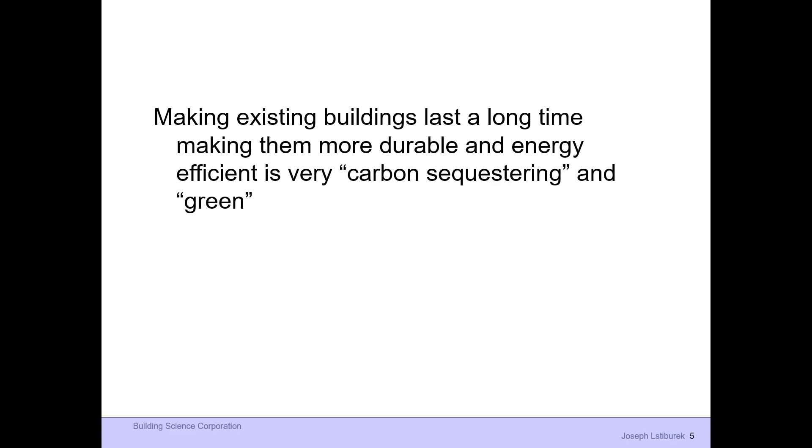Making existing buildings last longer and more durable and energy efficient is very carbon sequestering and green. So if you take a building that's already been built and turn it into something that lasts a very long time and is ultra energy efficient, wow. Of course, what I'm going to tell you is that we're doing it so wrong that we're actually destroying our existing old buildings because we're doing it incorrectly, and you're better off not doing anything at all instead of doing something that's stupid.

I'm already in trouble. Okay, that was a double duh. Yeah, there's more. Wood is good, it grows on trees. Repeat after me: wood is good, it grows on trees. I know, I'm a legend.

Triple duh. Yeah, there's more. New buildings are easy, existing buildings are hard. All these people saying we want to be net zero by 2035, or whatever, must be Harvard or MIT grads because they have no freaking idea. The new stuff is easy compared to doing the old stuff. And you want to do the old stuff in such a way that you don't destroy the historic character of it. So can we take existing buildings and not screw it up? The answer is yeah, but we're not doing it the right way right now. I'll get into that.

Historic buildings, really, really, really not easy. Because the best way to do things is to insulate the buildings on the outside. I grew up in Canada, and when it got cold, we would pull the sweater over the outside of us. We wouldn't eat it and shove it into our ribs. So you want to be a sweater wearer, not a sweater eater. Most wood frame buildings are built by people that eat their sweaters as opposed to wearing them, you know, duh.

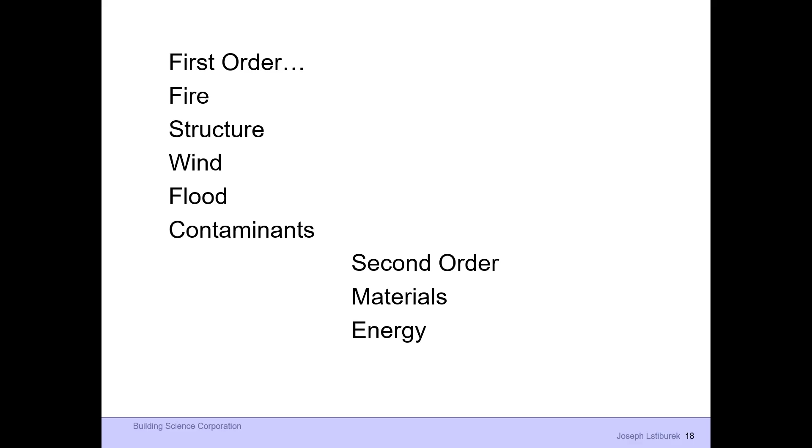So, first order: fire, followed by structure, followed by wind, followed by flood, followed by contaminants. The second order are materials and energy. Our codes evolved based on fire first.

The city of London burned, then Chicago burned in 1871, which was the last time the Leafs, I think, won. The very next year Boston burned, but nobody remembers the Boston fire because back then Boston always finished second.

So in the United States, we build out of stuff that burns, but not a lot of people die because we're very good at it. We just happen to be forgetting why we were so good. And so now thousands of buildings have burned in California, so we have to build a wall between California and the rest of the country so those ideas don't get across the Mississippi.

I warned them about this. Most of the houses that burned did so because their attics are vented. Vented attics let embers in. And then we're over-venting our walls. So you don't want to vent your wall and you don't want to vent your attic.

Oh my God, they're going to rot. No, they're not. You have to build them differently. Well, we have to ventilate our wall. No, you're an idiot.

And by the way, it's really dangerous. We'll get into that. The trouble is that the energy folks, they don't understand physics. They're activists. So if you can't do math or physics, you're an activist. And they're very, very successful. So we're changing the energy flow, and we're screwing up the other stuff that's working just fine.

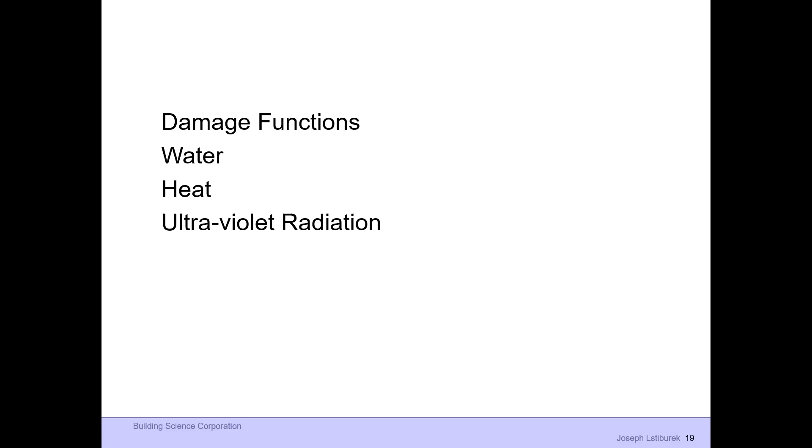There are three principal damage functions, and we call them damage functions because they cause damage. I'm just laying this out. The worst of the worst of the worst is water, followed by heat, followed by UV. They're listed in an order of importance. This is after we've handled fire and structure. And we shouldn't focus on these in such a way that we screw up fire and structure.

Fire first, structure second, energy last. What's driving the boat now? Energy. And it's screwing up the fire and the structure. I want the energy to be there. I just don't want to hurt the fire and the structure.

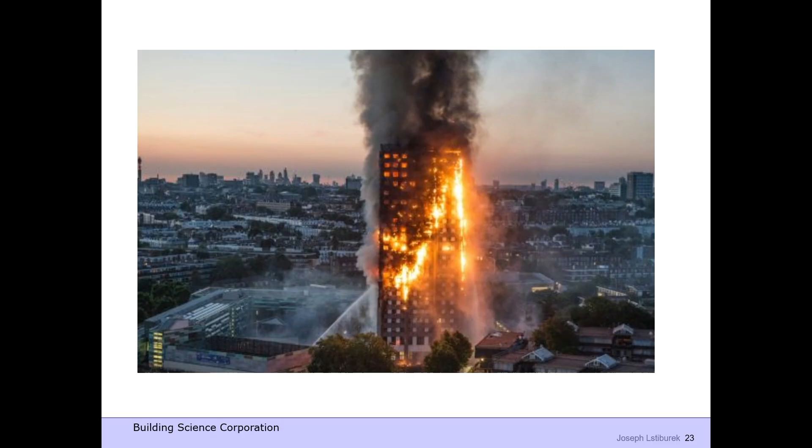Grenfell Tower, United Kingdom, June 2017. 72 people died. Now, what the press didn't tell you was that this was a retrofit of an uninsulated masonry building, and that the fire started on the second floor because they changed the heating and cooling systems to use refrigerants that were greeny-weeny but were flammable. So we have a flammable refrigerant because the greeny-weenies said we want to have greeny-weenyism. That started a fire that got super insulated on the outside to save energy. And, you know, this is embarrassing, disgusting, and stupid. And we want to make sure that none of those people cross the ocean with the pilgrims and the boats to bring that information to the United States.

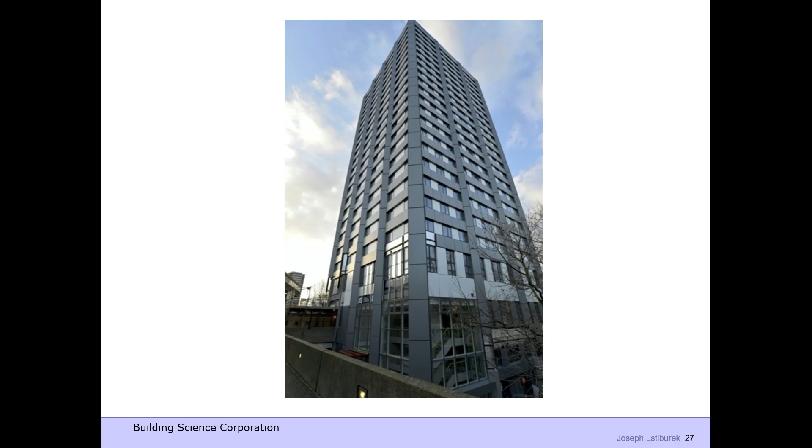I'm kind of making the stories up a little bit here. This is what it started as - it's 35, 40 years old, no insulation. It was beautiful. Then they insulated up the yin-yang wazoo on the outside. The real problem was the airspace, the ventilated cladding.

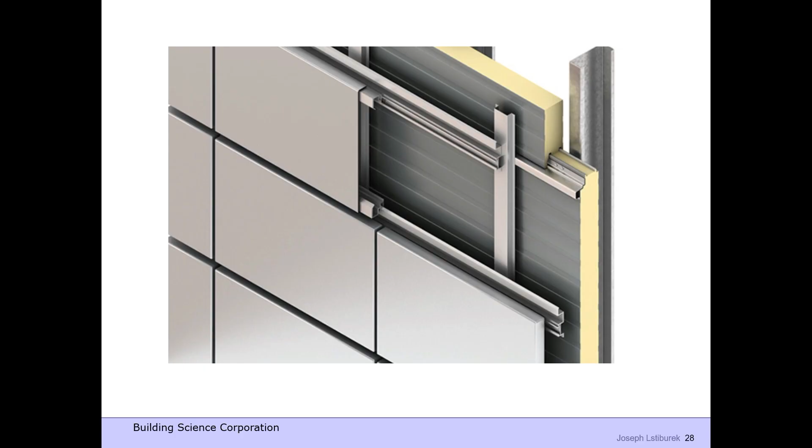That ventilated cladding allowed the fire to go up all the way. Well, we need to ventilate the claddings. No, you don't. Well, we have to have ventilated cladding. Says who? Well, we read it in, we did a WUFI analysis. You're an idiot.

Okay, I'm going to start talking about effective compartmentalization, egress, and whatever. So this is what the old building was. There was nothing there to burn because it was all out of concrete and rocks. Rocks don't burn. Repeat after me - rocks don't burn.

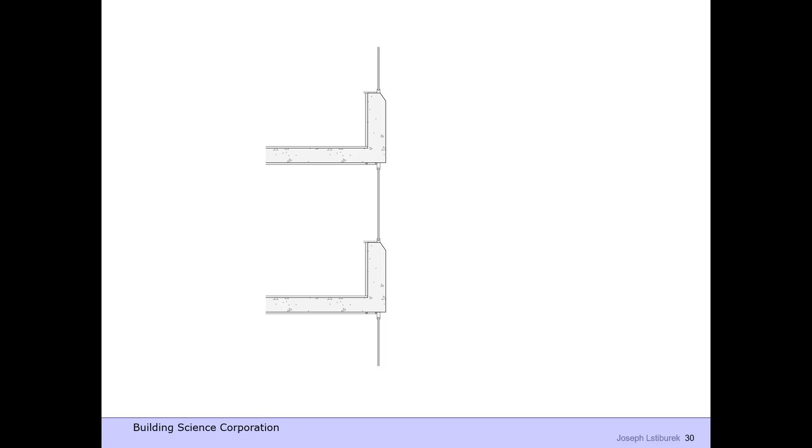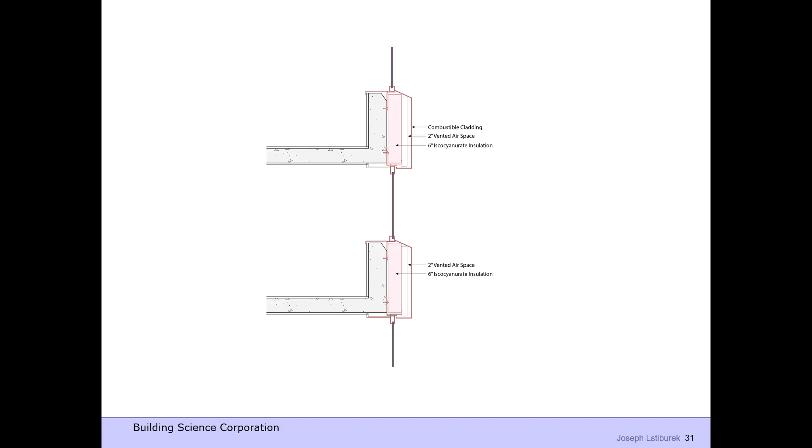So let's insulate it on the outside with compressed napalm insulation. And then ventilate it with a 2-inch airspace, because man, you want to ventilate the heck out of your cladding because it's more energy efficient. No, you're an idiot. So the fire starts on the second floor because of the flammable refrigerant, which they're not telling you about. You shouldn't have air conditioning systems that have stuff in them that burns. Well, it's green. You're an idiot.

And it goes up the cladding space, the 2-inch space. There are people that want 4-inch spaces because it saves energy. You're an idiot. If the airspace is a 1/2 inch or less, you don't have to fire stop it, because the boundary layer friction of the two surfaces starves the fire. We learned about this in the 60s.

Elvis Presley, not Elvis Costello. And so we burned walls and we figured it out.

So this idea of a 2-inch and 4-inch ventilated cladding to save energy is dangerous, and you shouldn't do it. Stop.

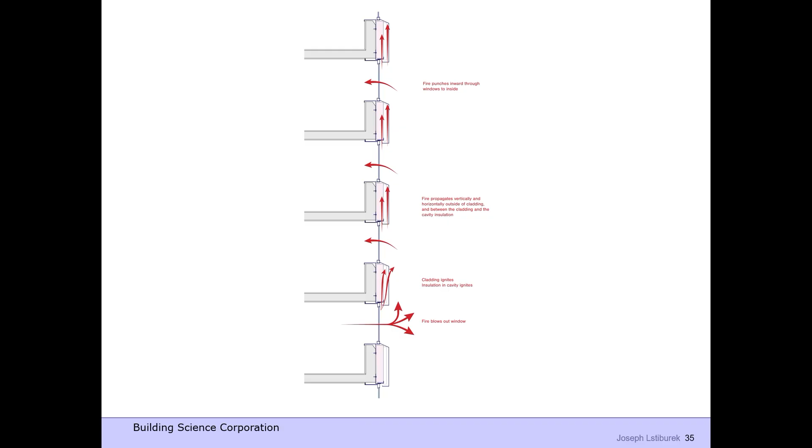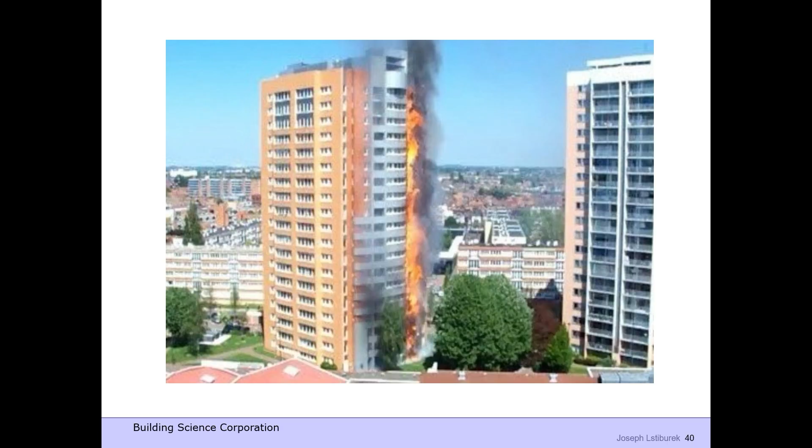There's going to be a name coming up that you won't believe was the actual name: the Dubai Torch Tower. If the airspace had been less than 1/2 inch, this wouldn't have happened.

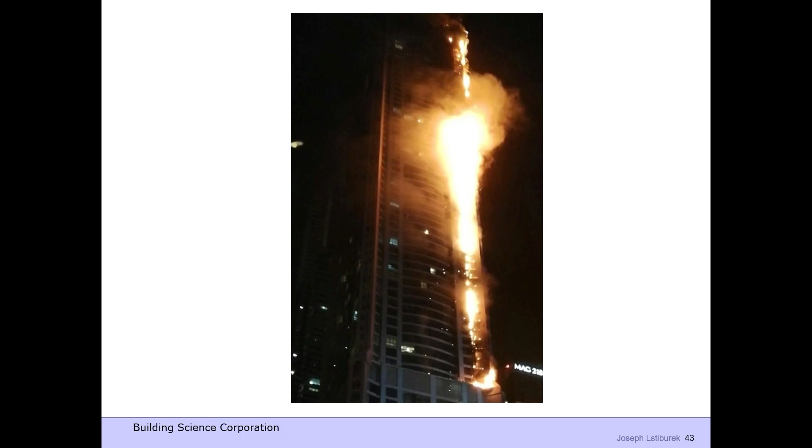And now for something completely different. Marco Polo Apartments, Honolulu, Hawaii, July 2017. How many people remember the name EIFS, Exterior Insulation and Finish Systems? You've got expanded polystyrene, EPS, with a very thin lamina. Well, it should burn. No, it doesn't, because there isn't an air gap.

So when they had a fire, the fire was basically constrained to just a unit or two. You don't lose the building, you just lose a little part. This is really important, okay?

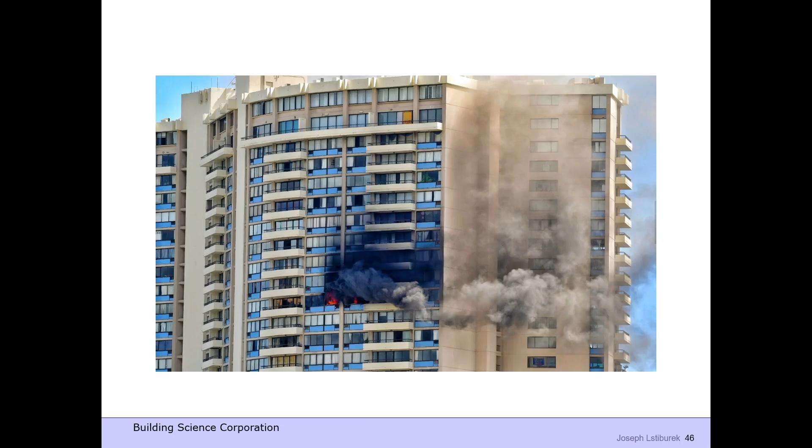Trump Tower. I'm sure you're going to blame the fires on Trump.

It popped out, but it was very limited because it wasn't a ventilated space. Didn't have a big space. Stop it with the big freaking spaces. Jeez.

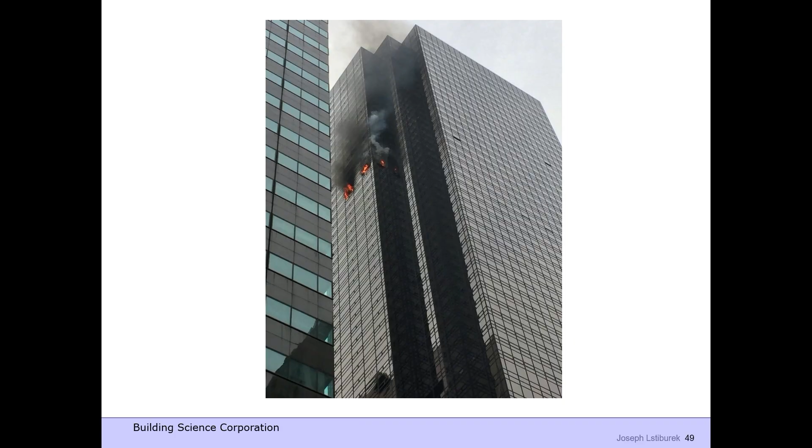Monte Carlo Casino. The thing that burned the most was the sign, which is mostly EIFS.

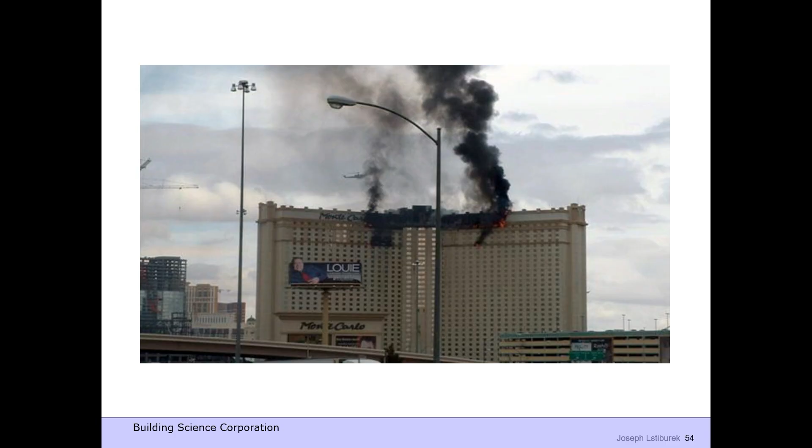So where did all this stupidity start? Hooker Chemical Company building, Niagara Falls, New York. They built it on top of Love Canal, but that's another issue. It was the first double wall. They had an 4-foot space between the inner layers of glass and the outer layers of glass.

The idea was they wanted to ventilate, and they were going to save so much energy because of the ventilation of the ventilated cladding. I got into trouble way back then because I argued with them. That was the first time I got yelled at by ASHRAE. I wrote a letter because ASHRAE gave them an award, and I said, in order for that to save any energy, they'd have to have supersonic flow between those two surfaces. And that would suck small animals and children off the sidewalk and inject them into low Earth orbit.

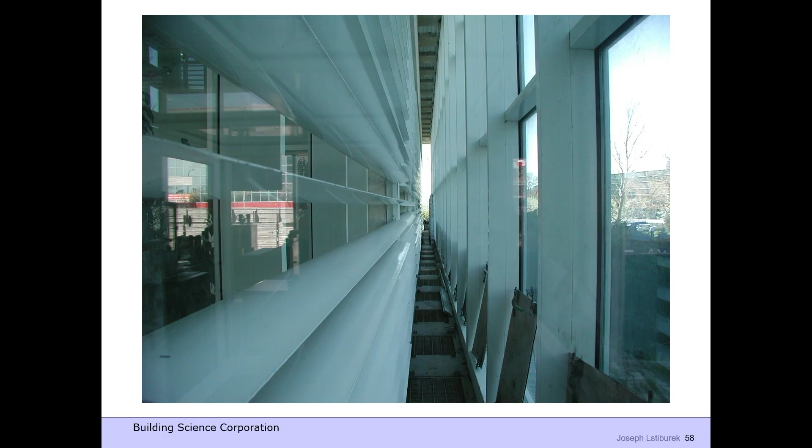Are you freaking kidding me? Colossally, batshit crazy, stupid. And we're encouraging it. I'm going to hunt you all down and talk sternly to you. Don't do this.

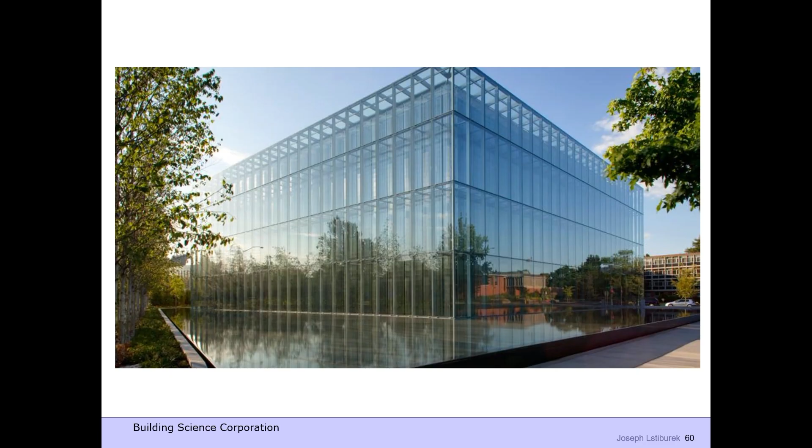Of course, if you are famous and you run a shoe company that's got a nice logo and you're a billionaire, they built this famous double wall. It got all kinds of awards. And I had some fun with them. I said, well, have you actually measured the energy consumption?

If you don't measure it, you're full of shit, speaking technically. I don't believe it unless you measure it. We did a simulation - I can get any answer you want with a simulation. Measure it. If you don't measure it, I don't believe you. I mean, look at this.

Wow, it's beautiful, only for idiots. I said, what you should do is that's where the homeless should be put up. Okay, that didn't get a laugh. It was probably not correct.

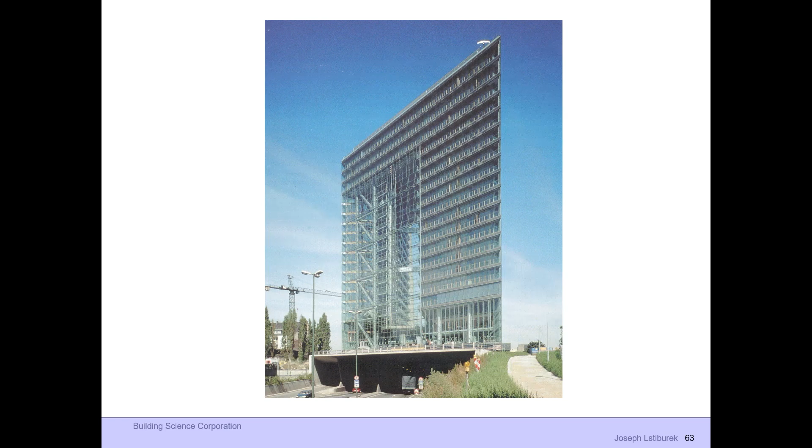So where did this stupidity come from? Yeah, they should stick to building Porsches. I mean, look at this. Oh, we got fans in there. Woo!

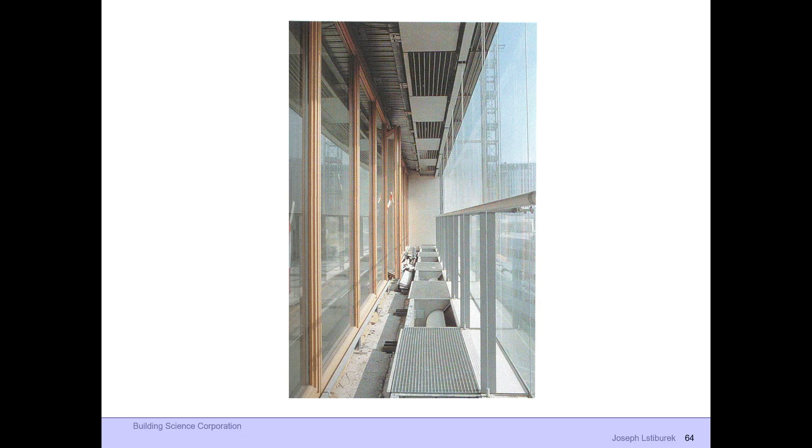Why don't you just have more efficient glass? You could have triple pane or quad pane, krypton filled, made by Lex Luthor Industries. Could have an R10 window that doesn't burn. I mean, look at this shit.

We need to build some kind of a trade barrier so this doesn't cross the Atlantic.

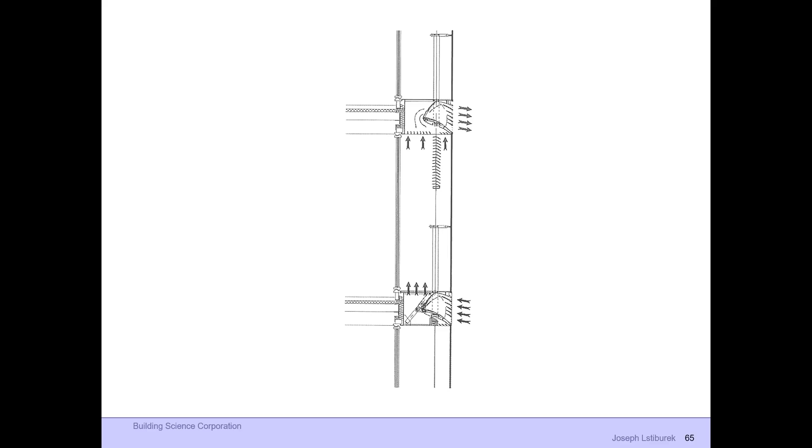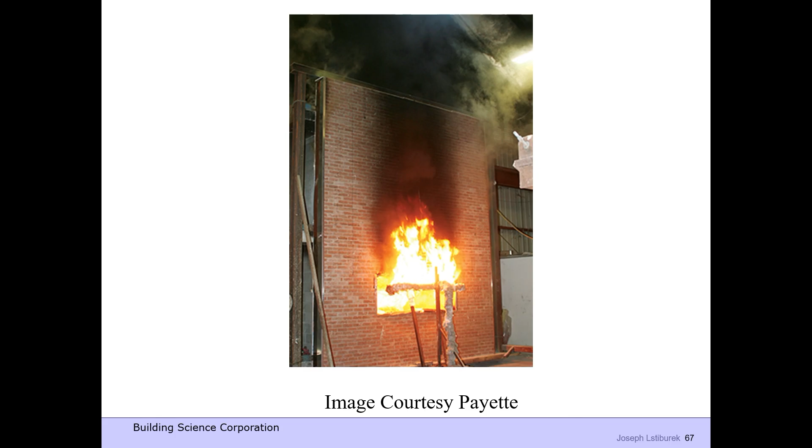Now, we became very good at figuring this out in the United States, NFPA 285. You actually build the wall and you burn it. If you don't burn it, I don't believe you. We did a calculation - I don't care. Burn it. We figured it out by burning things. Pass, fail.

Jesse Beitel was the legend. He's still alive. If you ever see him, shake his hand, hug him. I would hang out with him at code hearings, and he kind of adopted me. Wicked sense of humor, young stuff.

Young Joseph, make sure you burn it. If you don't burn it, I don't believe you. Okay, Jesse, okay.

Wildfires. Biggest problem: embers drawn into vented attics. Don't vent the attic. Anybody not get this? Well, you have to vent the attic. Why? To save energy? No, you don't.

To keep it from rotting? No, you don't need to vent it to keep it from rotting. Why do you vent the attic? You don't know, do you?

Well, it's going to make the shingles and the membrane cooler, and it will last longer. Well, don't use a black roof, use a white roof. Well, you're going to void the shingle warranty.

Okay, let me help you with this. Three identical roofs: one in Houston, one in St. Louis, and one in Minneapolis. Same size building, same insulation. Which roof is going to be the coldest?

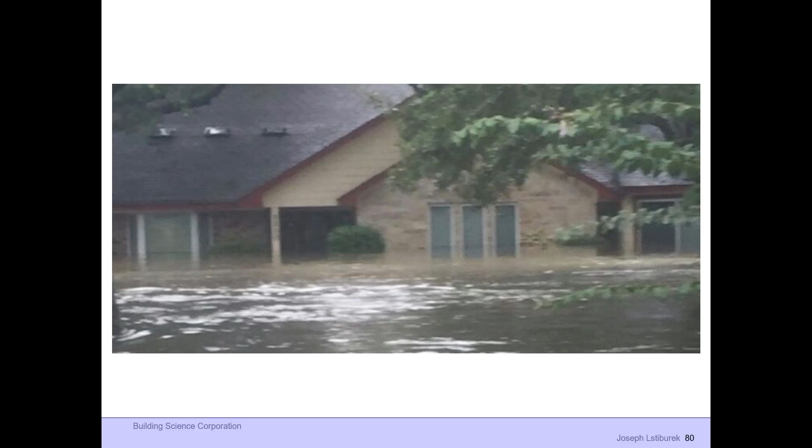So buildings that were built in the 20s and 30s are much higher. Why? Because the people that built them said, gee, it floods here, we should build up. Anybody not get that?

You go to New Orleans and you look at the older buildings, their floors are 5 and 6 feet off of the grade. The newer ones are just down there. Duh.

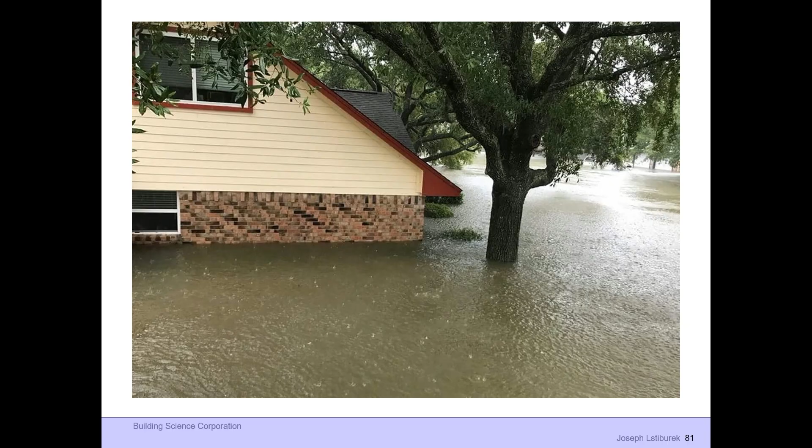Flood water is dirty, unhealthy. So part of this is once it drains, you have to clean it, decontaminate it.

No salvage by order of Smith & Wesson. This is Texas.

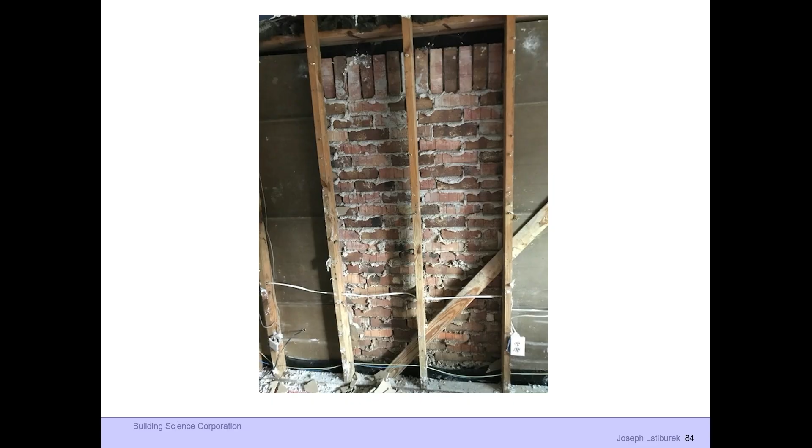So we wrote this up. It was Claudette's idea, I cleaned up some of the building science. LSU, the Houston home builders are really all over this.

Because we're going to still build stupid places where it floods, right? Right. Well, we can make it work. Yeah.

Oh my God, he's using spray polyurethane foam. We hate foam, get over it. It doesn't suck water, and it's washable, but only the closed cell, right? Right.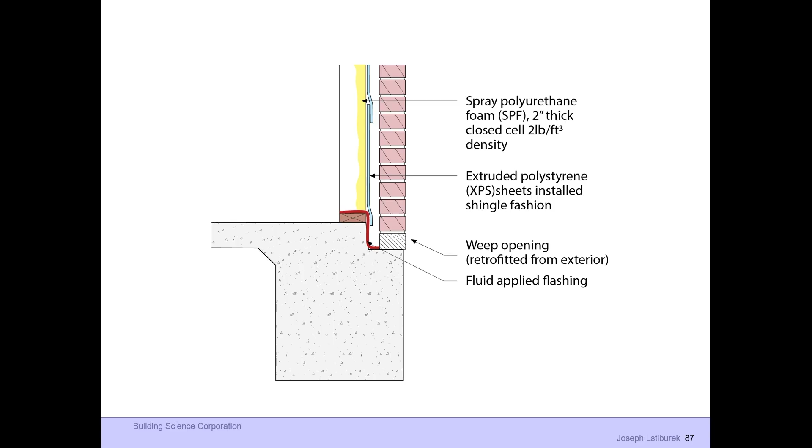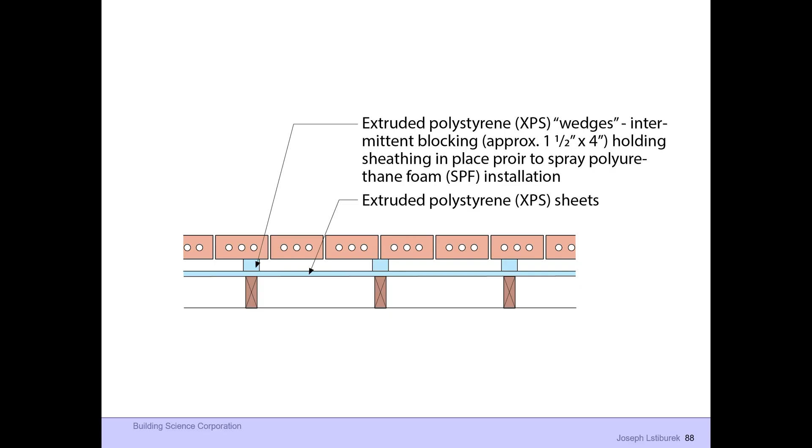Well, what about extruded polystyrene? Yeah, some of you hate it even more, but it's washable, right? Right. How about something that really pisses everybody off? Some extruded polystyrene, some closed cell, and an intumescent coating so it doesn't burn, and it's washable.

Well, this is a lot of carbon. Well, not over 100 years.

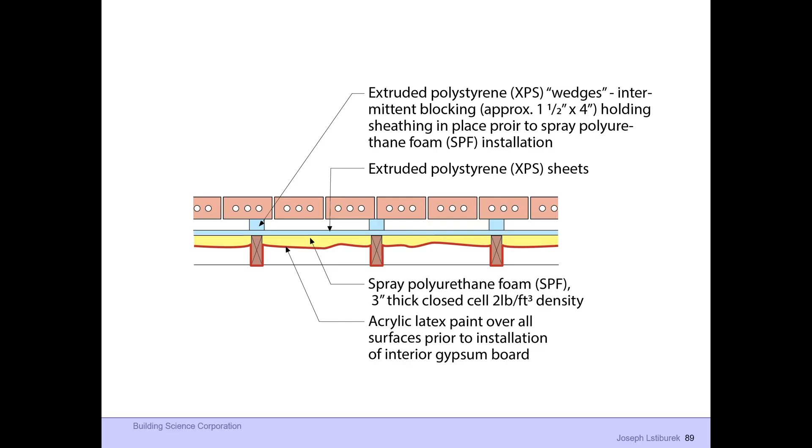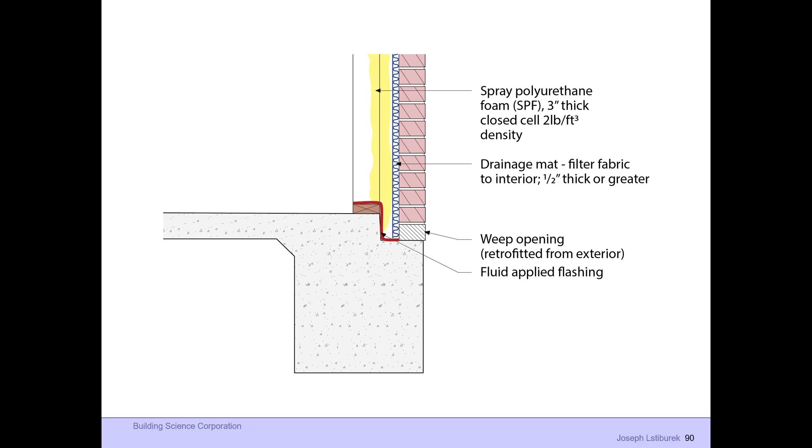How should we build it new? Put a drainage mat up, a half an inch or greater. Why? So it doesn't burn.

I just have to throw away the interior drywall on the first floor, right? Yeah, and wash it down.

What should you not have on the first floor? Carpet. Duh.

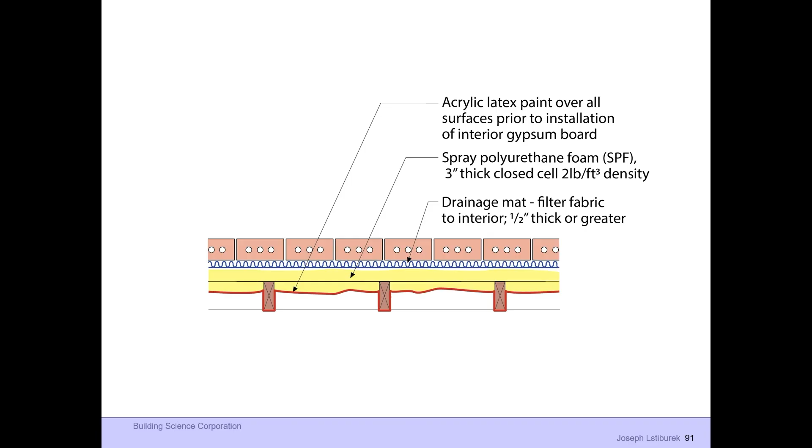All kinds of ways of doing it. There's a retrofit. Yeah.

What do they do in Florida? Well, they build up. They build the first floor out of blocks, put stucco on the outside. They paint the inside of the block. They got an air gap. And if it gets that wet, you just hose it down, right? Yes, Joe, yes.

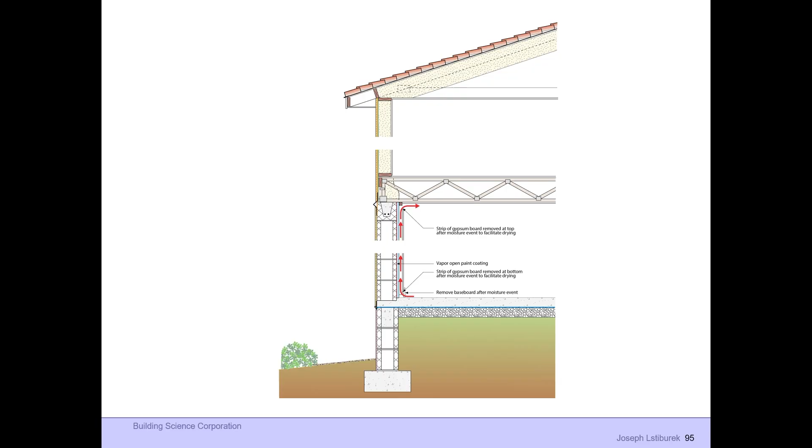Oh, can we do it with wood? Yeah, you can. Steel studs? Yeah, you can. Wow.

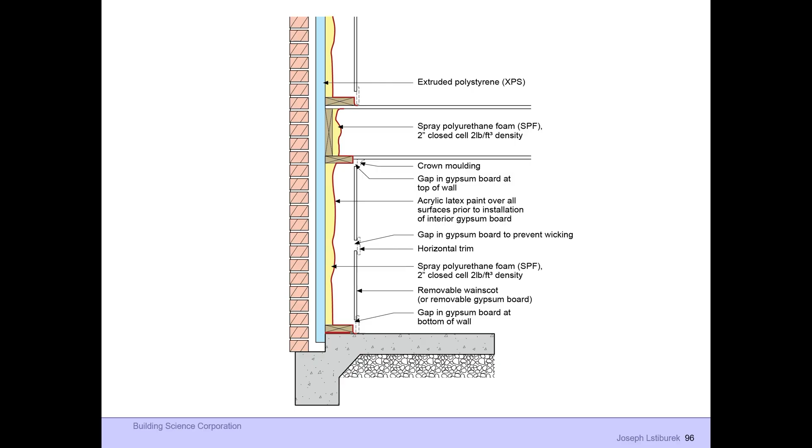Are we doing it now? Yeah. Again, Americans can be counted upon to do the right thing after all of the alternatives have been exhausted. Well, don't freaking build there. Yeah, good luck with that.

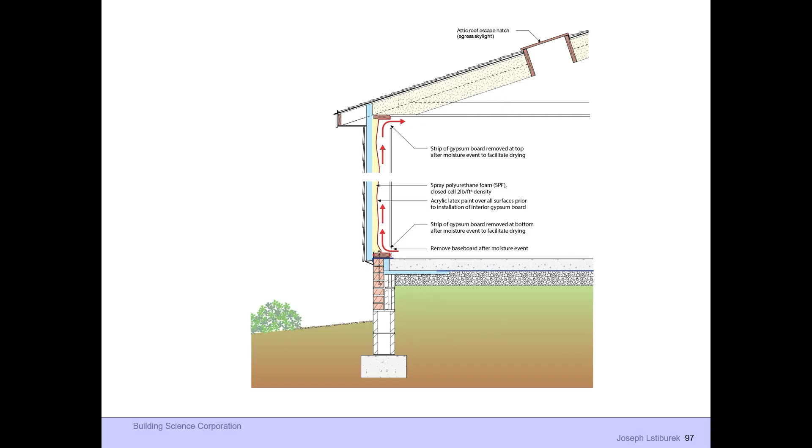Oh, even better. Whoa, it's got to be high enough, right? Right.

You can even dry it. Don't run the stucco into the ground. The stucco wicks water like crazy, right? Very capillary active. So you stop the stucco at the top of the slab and paint it.

And run a polyethylene vapor barrier and capillary break under the concrete. And you put a seat in the concrete because there's going to be some water in the block wall. When the water runs down the holes in the blocks, we kick it to the outside.

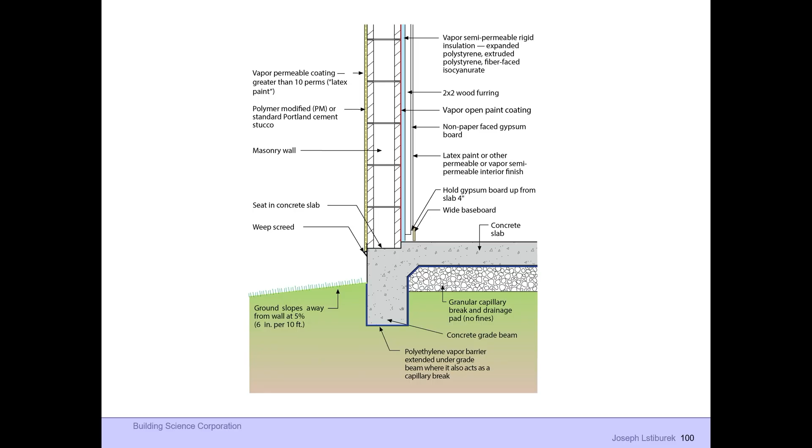So guess what we're doing now? All of the slabs in Florida have a seat. It only took 30 years. But hey, you know, it takes time.

Wow, this is a really robust wall that could handle the flood and a hurricane and an earthquake. Whoa.

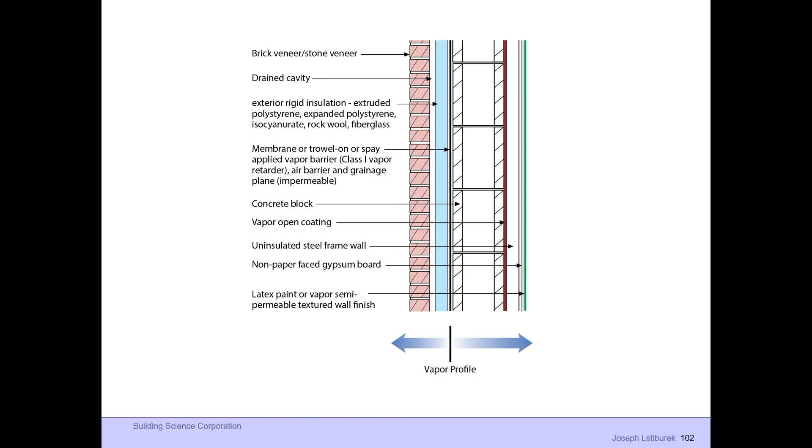You have to do the Carole King thing, the earth moves under my feet. It's earthquake resistant. Yeah, I know.

Put it on the inside. Well, I don't like foam.

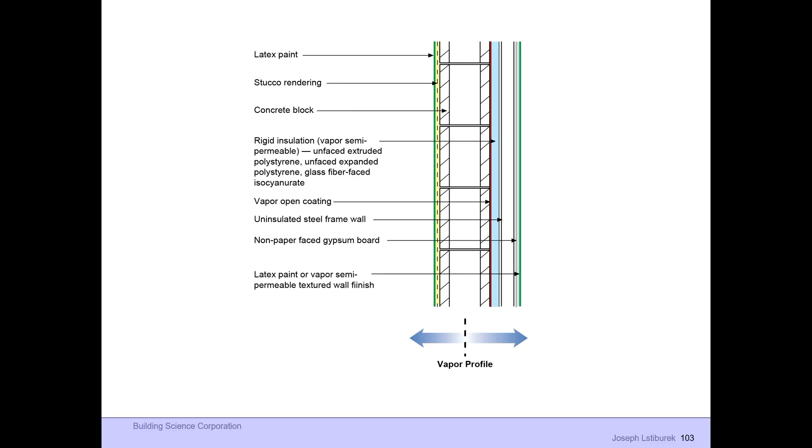Don't build where it floods. Hey, you know, you don't like it, don't use it. Don't build there.

I don't like all the blocks. Can I do it with steel studs? Sure, but don't put any insulation in the steel studs. Why? Insulating a steel stud is a thermodynamic obscenity. A 6-inch steel stud, put in an R19 batt, the effective thermal resistance is R5.

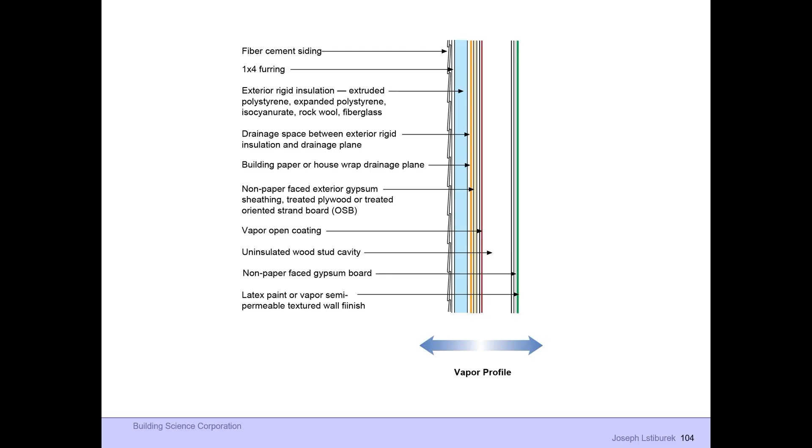Well, how do you know that? Well, because steel is 300 times more conductive than wood. You know how I know this? I've never seen wood wiring, or a wood frying pan. Well, wood frying pan once, but...

This is neat. This doesn't burn, doesn't blow away, isn't an earthquake problem. It can be washed and cleaned. It's energy efficient. We know how to do this. We aren't doing a lot of it, but nobody... we don't have the technology.

Yeah, we have the technology, just things have not become so intolerably painful and bad. Stupid has to hurt quickly, all right?

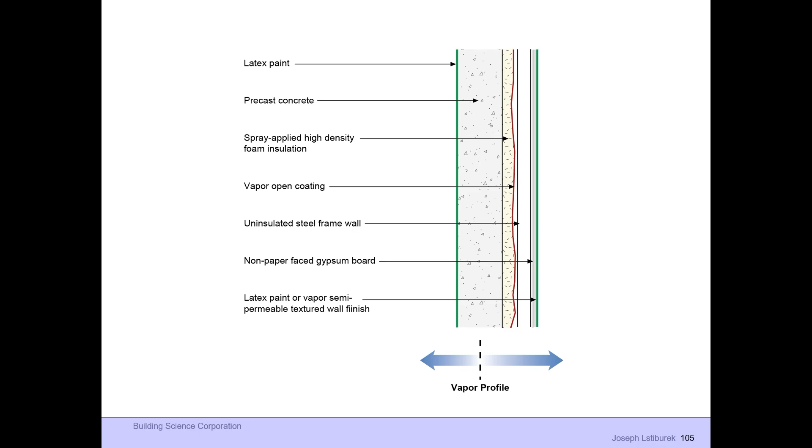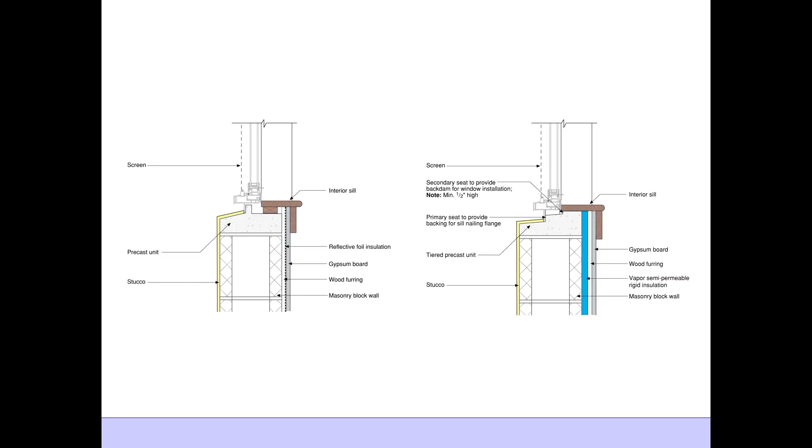There are only two kinds of windows in the world, windows that leak and windows that will leak. And windows are like people. As windows and people get old, we leak. You youngsters have no frickin' idea what's coming to you.

This is on the coast of the Carolinas, right? It didn't blow away, the waves crashed in, we saved energy, and nothing rotted. Woo-hoo.

We know how to do this. How many people have heard of the fortified program? Awesome. Sheathe the hell out of the outside of the building, then protect the sheathing and design it to dry in both directions. And don't vent the roof. Vented roofs blow off.

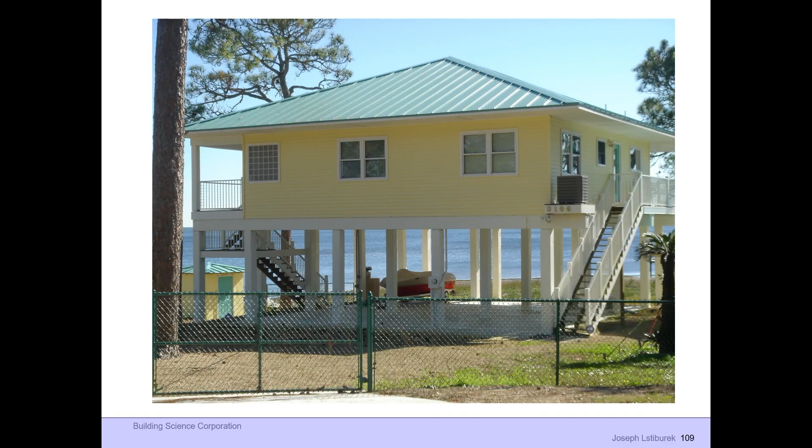This is in Pensacola, called the Redneck Riviera. It's the Carolinas. Wow.

I want you to know Brad Pitt didn't run. He invested another $20 million of his own money to fix it. It's too bad he and Angelina didn't get along, but he should be mayor of New Orleans. Guess what kind of architect he'll never hire? Anybody from California or New York.

Crawl space is very, very robust with floodwaters, but you've got to make sure you have a vapor barrier with continuous insulation on the underside. So it's got to be extruded polystyrene or foil-faced polyisocyanurate, rated for fire. And it would be nice to have the grade inside higher than the grade outside.

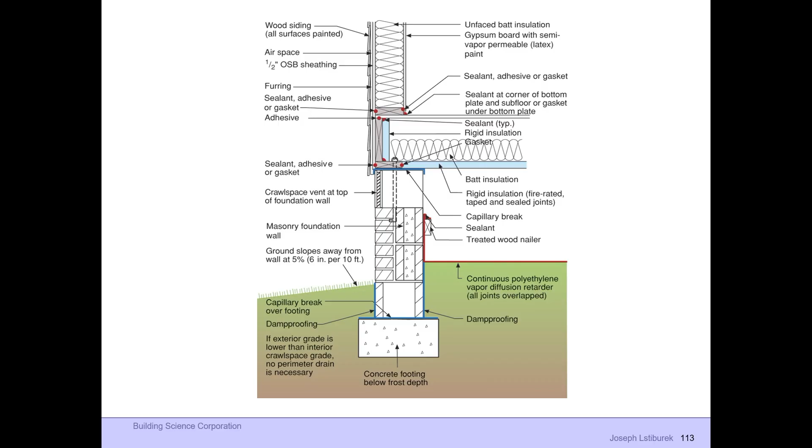Pier foundation up high, with rigid insulation underneath. Notice the insulation doesn't fill the floor cavity completely - there's an airspace on top. You know why? It makes the floor more comfortable. If you fill it completely, the joists are going to be colder.

How do you know this, Joe? I turned 70 three weeks ago. One day, you're going to know.

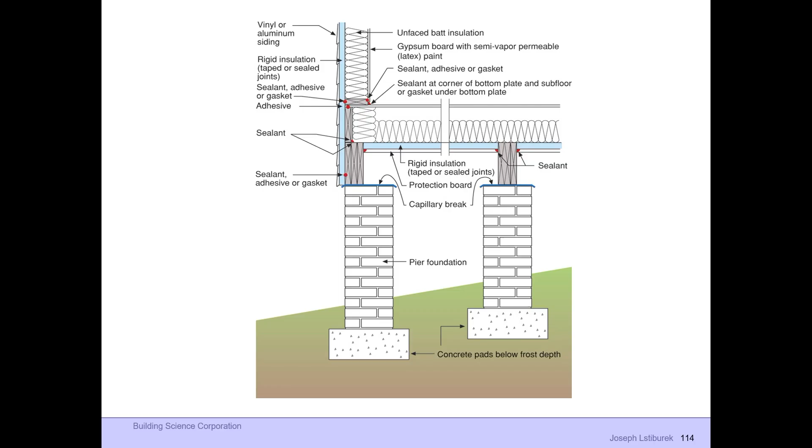Energy flow. So this is what made me famous after I got kicked out of Canada.

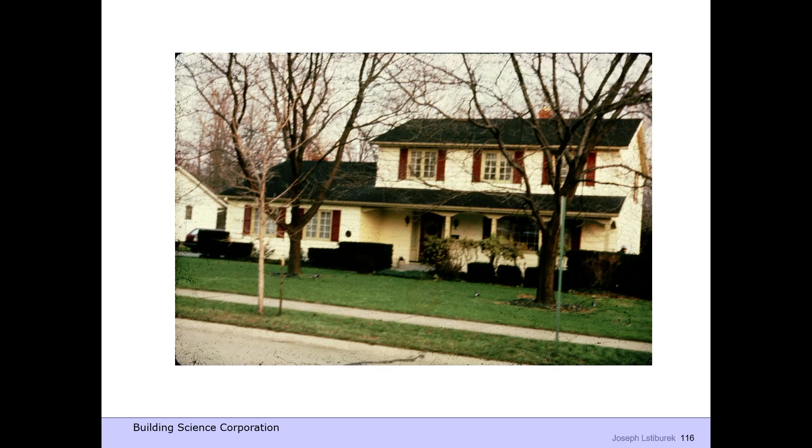This is Cleveland. Gus Handegord and John Timusk, my mentors, said you need to go to Cleveland and figure out why all the paint is falling off their walls. I said, well, you guys already know this - why don't you tell me? They said, you need to figure it out. Go. So I would drive 5.5 hours from my mother's basement in Toronto, because I was already kicked out and single again, in a rusted out Ford Tempo.

And I met a guy who had a radio call-in show on Sunday mornings - House Mender Makes House Calls - and his name was Jim LaRue. He said, hey, I just got this guy from Canada, he wants to look at peeling paint. Any of you people got peeling paint problems, send us a card and the address and we'll go have a look. I got 500 cards.

And I went and saw 500 buildings. Yeah, that's me. The correlation is that these older walls were retrofitted with insulation, which lowered their drying potential and the paint fell off. This was my master's degree - insulation-induced paint and siding failures - that led to my first peer-reviewed published paper.

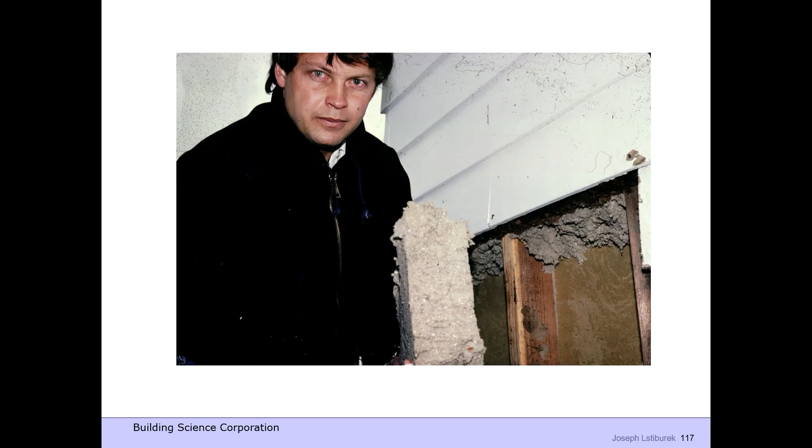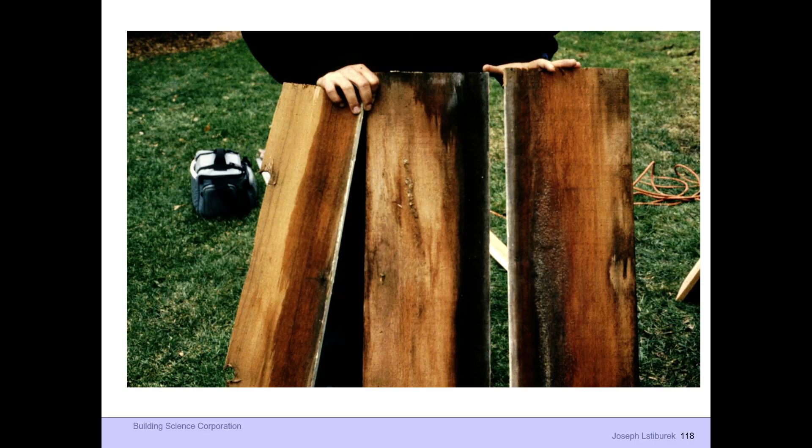Well, we shouldn't insulate. No, we just need to insulate differently. The water was wicking in at the overlaps - always has been wicking in at the overlaps by capillarity - but the escaping energy allowed it to dry. So what was the solution?

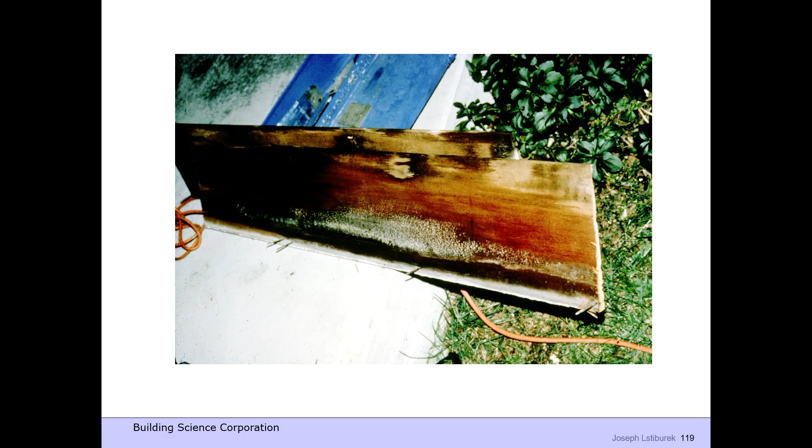Oops, I thought I put the answer in. We would put wedges in. The wedges would open up the laps to provide a capillary break. In new construction, what do you do? You paint all 6 sides of the wood before you put it up, right? You also use bumpy nails - when you blind nail, you have a bumpy nail.

Who told you about bumpy nails? If you go back 100 years, the old timers used bumpy nails because they were actually smarter than us. They figured it out, but it's in old books found in things called libraries. But to get them, because they're old books, you have to ask a librarian, and that involves a social interaction - which is why youngsters have no idea about any of this stuff.

When we go to a bar later tonight, there are stories I'm going to tell you, but I can't tell you right now.

We insulated the attic, and the attic got cold. Frost would form on the nails, and the sheathing would get wet. When the attic wasn't insulated, escaping heat dried everything out. Does everybody understand what's going on here?

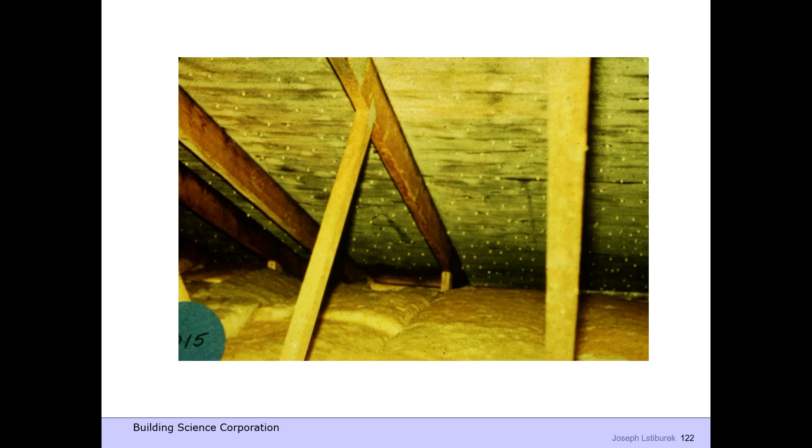So the only way to stop this from happening was to keep the moisture inside the house from getting into the attic. So we air sealed it. When we air sealed, what did that do to the furnace chimneys? And what else did we do? Well, vapor barriers in the wrong place.

Moisture flow is pretty straightforward. It goes from warm to cold. Why? Because of the second law of thermodynamics. The science has been proven.

You know, you're clearly an arts graduate — you don't prove science, you can only disprove it. Nobody's disproved this. If you were to actually disprove it, you'd get a first-class ticket to Scandinavia for a Nobel Prize. So there are two things you've got to remember.

Moisture flow is from more to less and from warm to cold. You can do this experimentally. Take something wet and touch something dry — the dry thing becomes wet. Who knew?

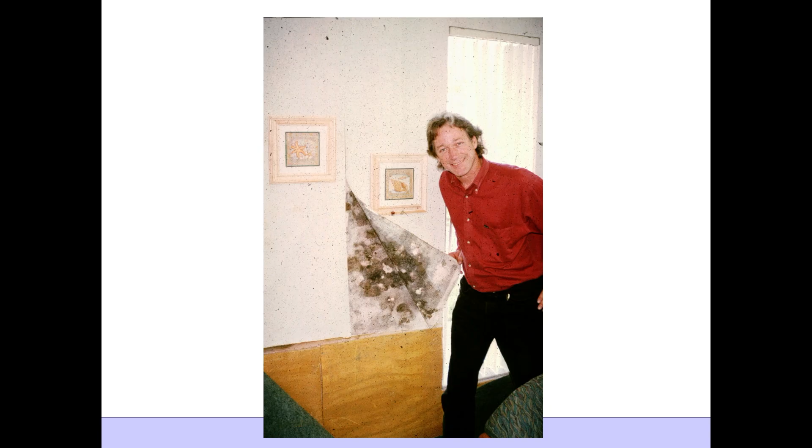So let's put vinyl wallpaper on the inside of an air-conditioned building. The moisture is going to go from hot and humid outside, blow through the assembly, and stop. And that's where you're going to get mold.

This is a famous industrial hygienist, and he's been wanting me to never show this picture — he wants to buy it back from me because he's now saying you have to wear a mask and protect yourself. And I'm saying, well, okay, if you give me the pictures you have of me doing stupid stuff — we're still negotiating. I'm looking for a quid pro Joe.

Mold doesn't have an internal digestive system, so it exudes enzymes outside of its body, and these enzymes react with the plasticizers in the vinyl, giving you the pink and yellow spots on the inside. We call that the Marriott measles, the Radisson rash, and the Hyatt hives. Because what are the moldiest buildings in the United States?

Air-conditioned hotels with vinyl wallpaper. It gets worse — they have rooftop exhausts that pull air out of each unit, so they're under negative pressure. So the hotel sucks and has a condom on the wrong side. There's a reason they don't let me teach undergraduates, okay?

Stucco failures. Exterior insulation finish systems. I predicted this was going to be a problem. Why? Because I was so smart? No, I was stupid before everybody else — in other words, I did one of these and screwed up, and I said, oh man, that's dumb.

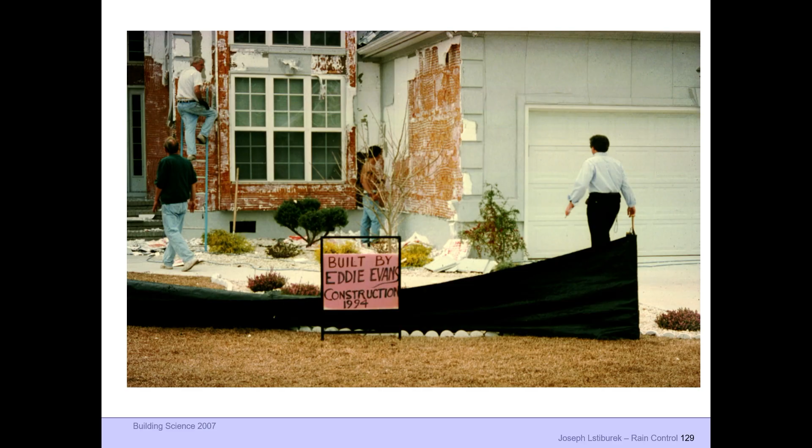There's Eddie. Okay, this is not Eddie, okay? He's a famous water guy — Steve Ruggiero with SGH, one of the smartest guys in the world in this. And he's been wanting this picture back. Of course, we're — I mean, it was just one duck.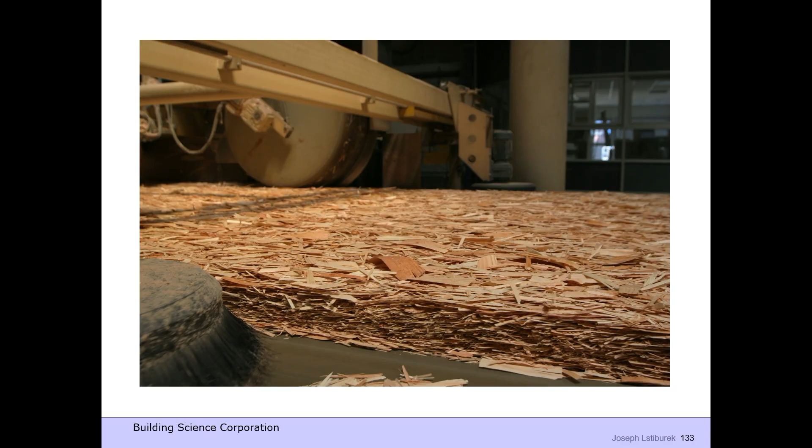I mean, really? This is better than plywood, right? No. But I can make it work. How? Have drainage on the outside, and don't have a vapor barrier on the inside.

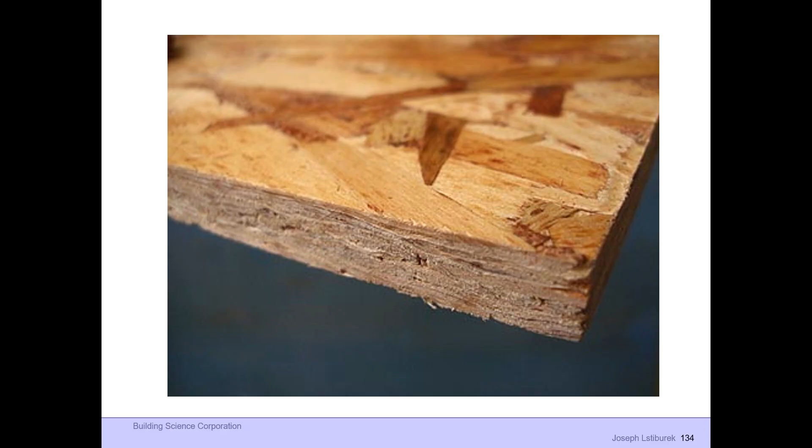This is a little simulation I had some fun with. Back in the days when the university still allowed me to teach youngsters, we had a lab. I have a piece of plywood and OSB exposed to the same conditions, and the OSB turns to crap and the plywood is just fine.

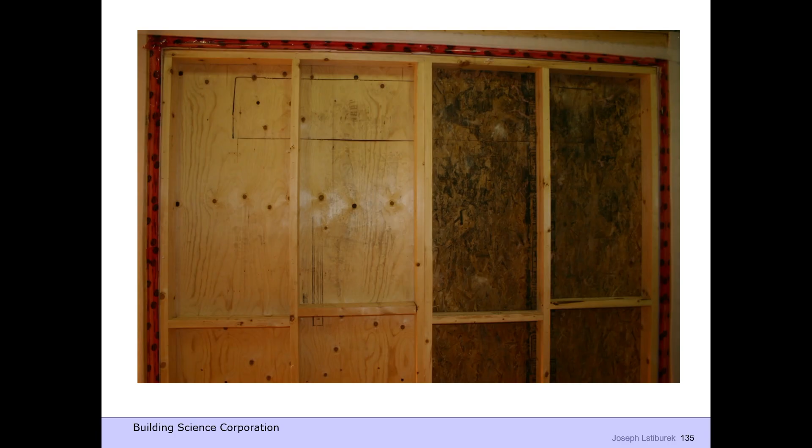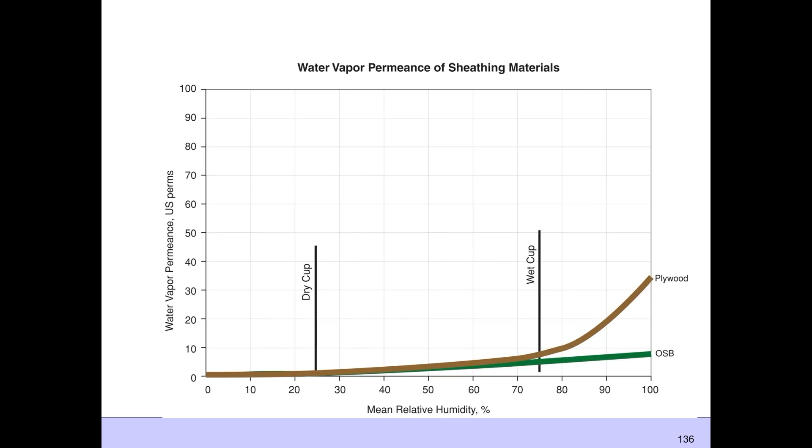Now, wouldn't it be neat if somebody invented an OSB that had the same curve as plywood? I know it's happening. I can't tell you much, except, with a John Lee Hooker, one bourbon, one scotch, and one beer. For you youngsters, that would be a Thorogood.

All right, Vancouver, Canada became the rot center of North America because we had cold weather, lots of rain, and an incredible amount of OSB. We went from 2x4s to 2x6s to increase the thermal resistance, and they decided to put polyethylene air vapor barriers on the inside.

Poly is a plastic condom. Don't do it. I'm tired of the passive house people running around with the polyethylene. I will hunt you down and talk sternly to you.

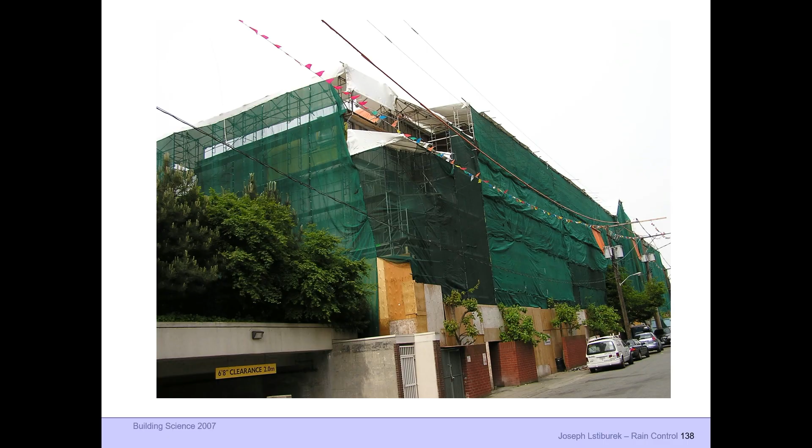So many buildings rotted so quickly that the joke was that when you applied for your building permit, they asked you what color the tarps were going to be when you had to redo the building in 5 years. And what do we do with that technology? We exported it to Cleveland.

Yeah, and Pennsylvania. So Pennsylvania is now the stucco rot capital of North America, because there's an awful lot of stucco on 2x6 walls over OSB in Pennsylvania.

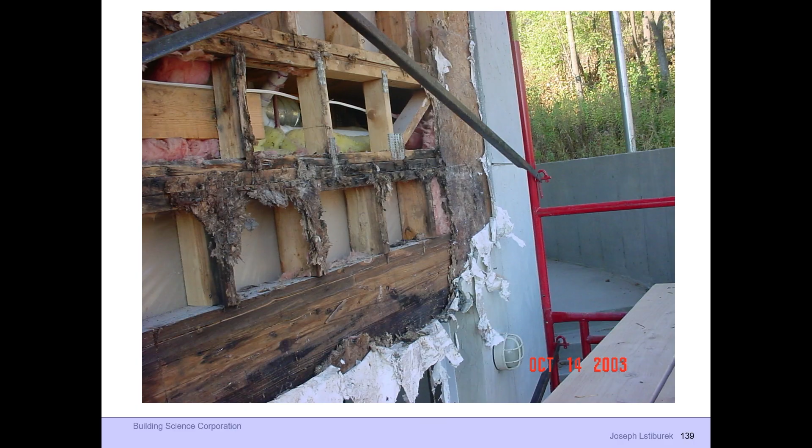Now, what happened? Well, in the old days, like a long time ago, we had things called building paper that was made out of impregnated felt. And we would call it 30-pound felt, because it would weigh 30 pounds per square for every 100 square feet. Now it's called number 30, because it only weighs about 15 pounds.

Well, why is it a big deal? When we put stucco up in the old days, over 30 pound felt, the 3 coats of stucco, the water would be absorbed by the felt paper, and it would expand, wrinkle, and debond from the back of the stucco as it dried. And that allowed what to happen? Drainage. Wow! So now what?

Well, we put 2 layers up. The outer layer is a bond break to allow drainage to occur between it and the back layer, right?

DuPont had a product called stucco wrap, and I got into trouble because I said the only product it doesn't work with is stucco. So I woke up one morning with a roll of stucco wrap in my bed.

But I love stucco, wrapping it with tar paper over it, right? There you go.

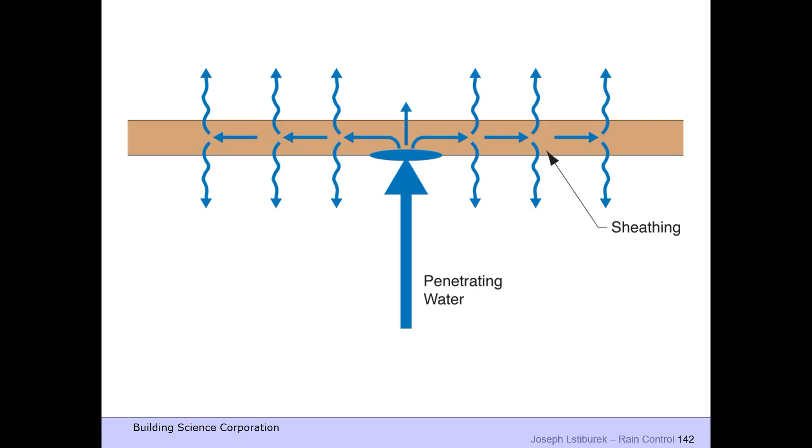Okay, you're not excited about this - you ought to be freaking excited about this. What you could do is do the same thing with OSB. So I went to the OSB industry and said, can you make me bumpy OSB?

Get out of here - you know, we're not sure the framers are going to be smart enough to put the bumpy side out. And we taught sod layers green side up, so surely to hell we'll be able to teach framers bumpy side up. But that didn't go anywhere.

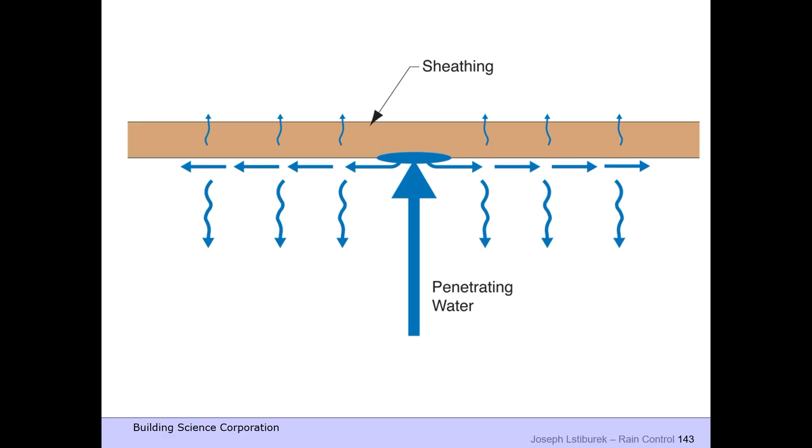And I went to the people that made building papers and wraps, and I said, can you make me a bumpy building paper or wrap? And they did - but I wasn't smart enough to patent it, so I'm working today.

All right, contaminants. Dilution is not the solution to indoor pollution. Source control, source control, source control. Now I spared no expense at providing a demonstration.

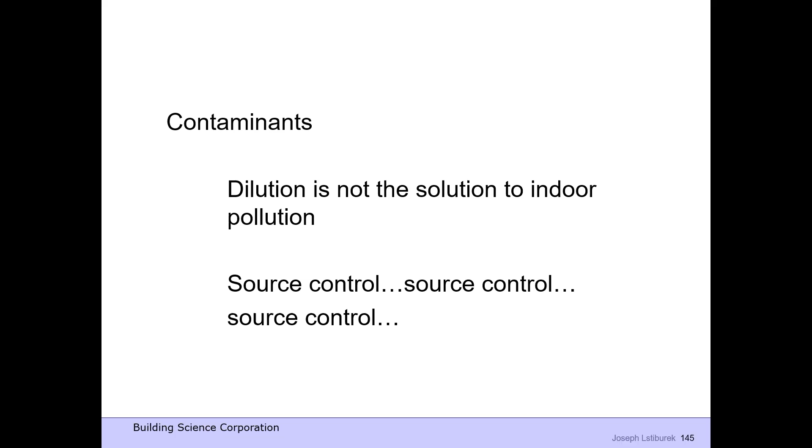Air is a fluid. This is a volume of clean air. This is an equal volume of dirty air. I'm going to show you the effect of one air change. Is this clean?

Dilution is not the solution to indoor freaking pollution. Oh, we need to increase the ventilation rate or people are going to die - you're an idiot. Don't build your building out of stupid stuff, don't do stupid stuff in the building.

So don't build out of bad stuff, don't fill your building with bad stuff, and don't do bad stuff in your building.

Well, like what? Well, finishing your furniture in your living room. Rebuilding your carburetor in your second bathroom bathtub, right? All right.

Dilution works for people, but not for contaminants, because you can't do source control for people. Mrs. Kosnowski, you've got 6 kids, 5 of them have to move out - that ain't going to work. So you ventilate for people, not for the building. You ventilate for people, not for the building. Source control for the building. Source control for the people that are doing stupid stuff in the building.

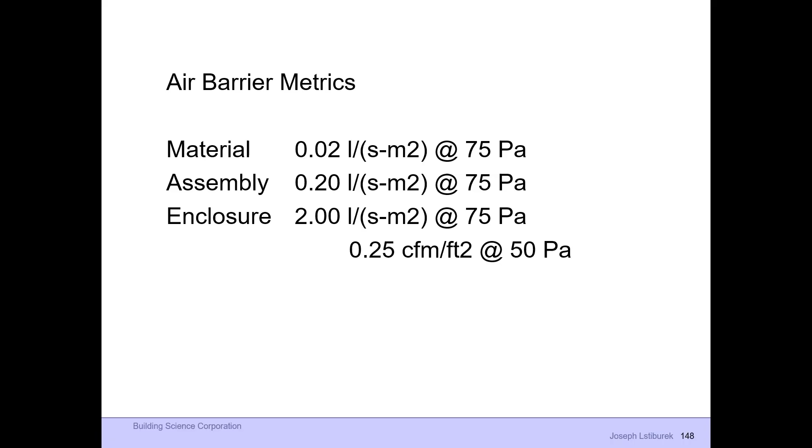And here's what I said—I said we should probably test this. We don't have time, give us your best judgment. Well, that was the best judgment, and it turned out to be pretty good. But you shouldn't do stuff like that. It took 5 years and several millions of dollars of other experts to figure this out, to say well, that was actually pretty darn good.

Well how'd you know to do orders of magnitude? I was the last engineering class in Canada not allowed to use a programmable calculator—we had to use a slide rule. And with a slide rule you never knew where the decimal point was, so you had to do a calculation with a pencil to figure out where it goes. There was a cigarette back then called Lucky Strike, a white package with a red dot, and you had to calculate the order of magnitude on the white part of the Lucky Strike. So we were called Lucky Strike engineers—white shirt, short sleeve, collar, pocket protector, and Lucky Strike. I never smoked, but I needed the Lucky Strike to figure out the order of magnitude.

So that's why I figured, well shit, if it worked, we changed the entire code in the third world nation to the north of the United States, we could probably get close. And it turned out that it actually worked out. But we shouldn't do stuff this way. I'm thrilled I was the guy, but I'm embarrassed that's not how we should change things. We should measure things, push them to failure, and then put in the safety factor.

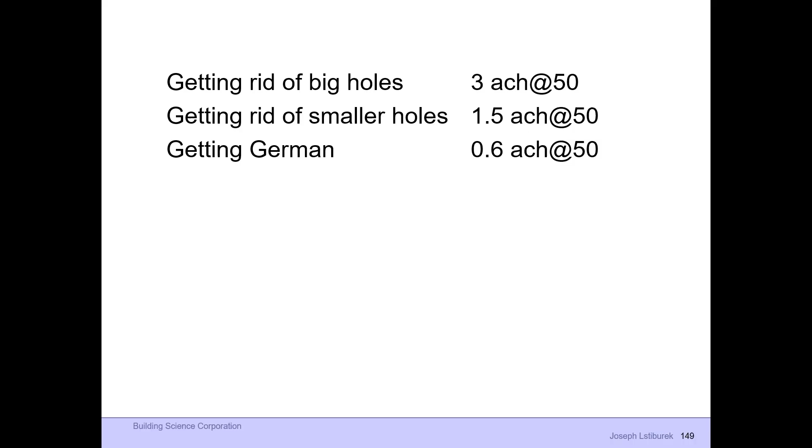Getting rid of big holes, 3 air changes per hour. Getting rid of small holes, 1.5. And getting German, 0.6. The 1.5, I already told you, I simply divided the Swedish 3 by 2. The 0.6 was—ask Hartwig Künzel of the Fraunhofer over a beer. He's one of the only 2 Germans with a wicked sense of humor that I know.

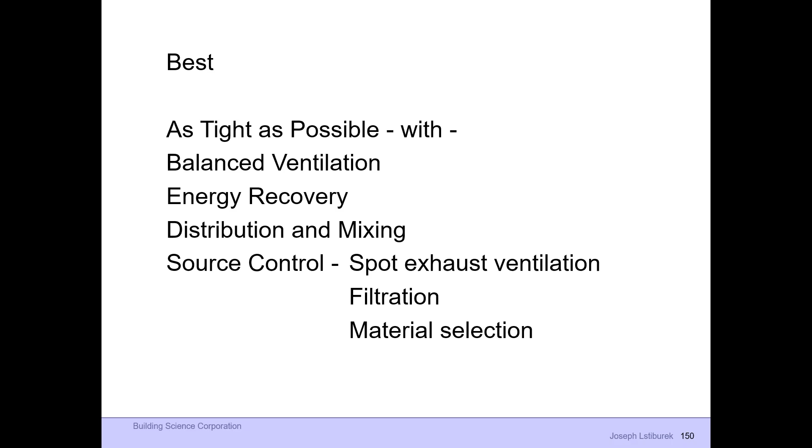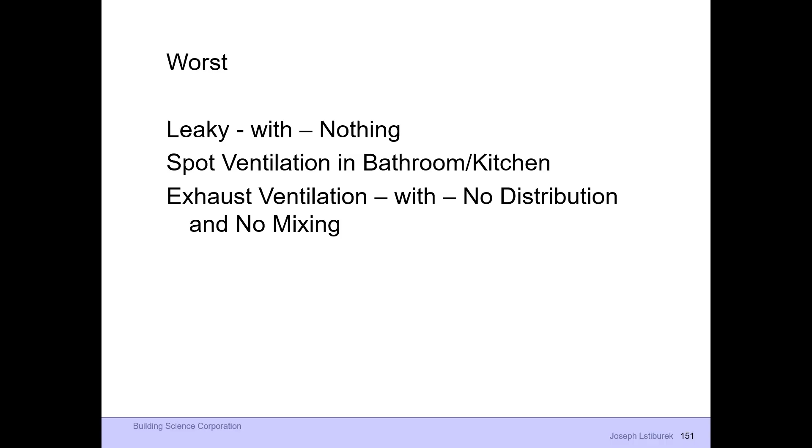So best: as tight as possible with balanced ventilation, energy recovery, distribution and mixing, spot exhaust, filtration, and material selection. Right? I mean, come on, we know how to do this. What's the worst? Leaky with nothing, spot ventilation, exhaust ventilation with no distribution and no mixing. That's what we're doing right now. And that's unacceptable. Now, new motto: build tight, over-ventilate right.

Let me explain what I mean by that. The folks in the indoor air quality business are so concerned about contaminants, they want to double and triple the ventilation rates to deal with them, right? We want more, we want bigger numbers. And I'm saying, you don't get it. It doesn't work very well. And guess what?

What does that do to the part load humidity and latent problem? You actually create mold. Okay, another reason I became famous is that air conditioners are dehumidifiers, but they only dehumidify when they're running. What have we done to the runtime of the air conditioner? So let's increase the air change in an efficient house with really efficient air conditioning, and now you need to buy a...

Dehumidifier. So remember Mrs. Robinson, the movie where the future was plastics? The future is dehumidifiers. Now you go up north to Canada, the high ventilation rates end up drying the house out too much, so you need a humidifier.

And I got into trouble because I said that humidifiers were ISIS bioweapons. Yeah, because they evaporate bad stuff, and even the CDC says you have to use, or sorry, the Mayo Clinic says you have to use distilled water. And I see that all the time, I always see everybody using distilled water with their humidifier, right? Well, the CDC said that the humidity helps fight COVID.